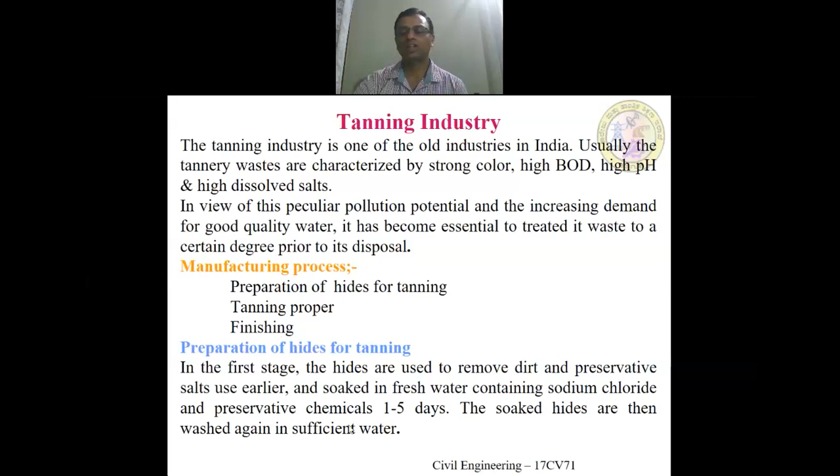How is it manufactured? The manufacturing process includes preparation of hides for tanning, tanning proper, and finishing. Preparation of hides for tanning: in the first stage, hides are washed to remove dirt and preservative salts used earlier and soaked in fresh water containing sodium chloride and preservative chemicals for 1 to 5 days. The soaked hides are then washed again with a sufficient amount of water. So here you get wastewater with a highly alkaline condition.

Limed hides are then mechanically cleaned of hairs and flushed in wooden vats with running fresh water. The bating prepares the hide for tanning by reducing pH. So by reducing pH, we can go for tanning. The deliming and bating is carried out in a vertical drum in a warm solution of ammonium salts and commercially prepared enzyme. So to reduce the chemicals, we can use enzymes.

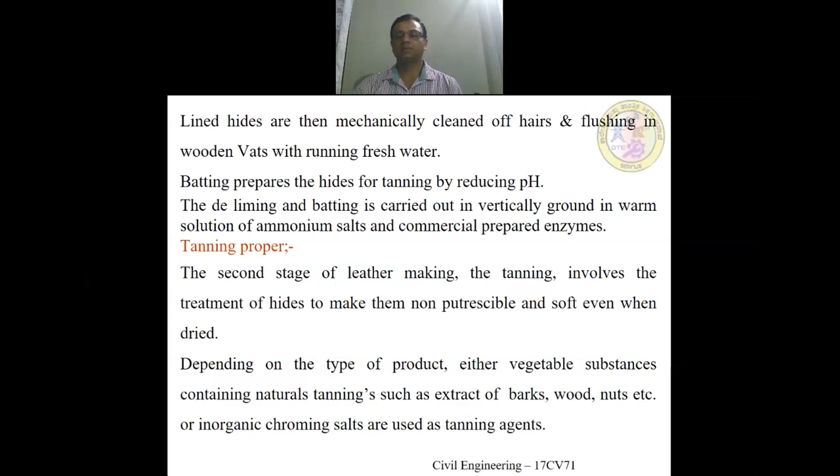Tanning proper is the second process. In the second stage of leather making, tanning involves treatment of hides to make them non-putrescible and soft even when dried. The second process concentrates on making it soft. Depending on the type of product, either vegetable substances containing natural tannins such as extracts of barks, wood, nuts, etc. or inorganic chromium salts are used as the tanning agent. Vegetable tanning is used for heavy leather while chrome tanning is used for light leather. So here vegetable tanning for hard and chrome tanning for light leathers. The vegetable tanned leathers are washed off after tanning proper.

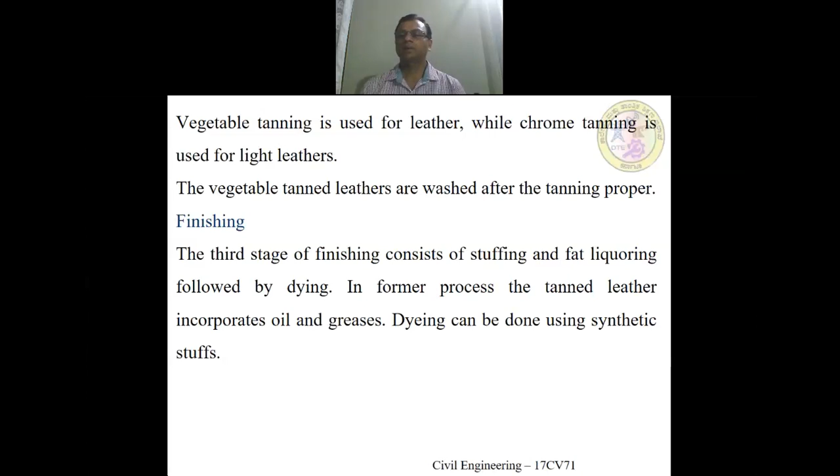The last step is finishing of the leather. The third stage of finishing consists of stuffing, fat liquoring, followed by dyeing. In the former process, tanned leather incorporates oil and grease. Dyeing can be done using synthetic dyestuffs.

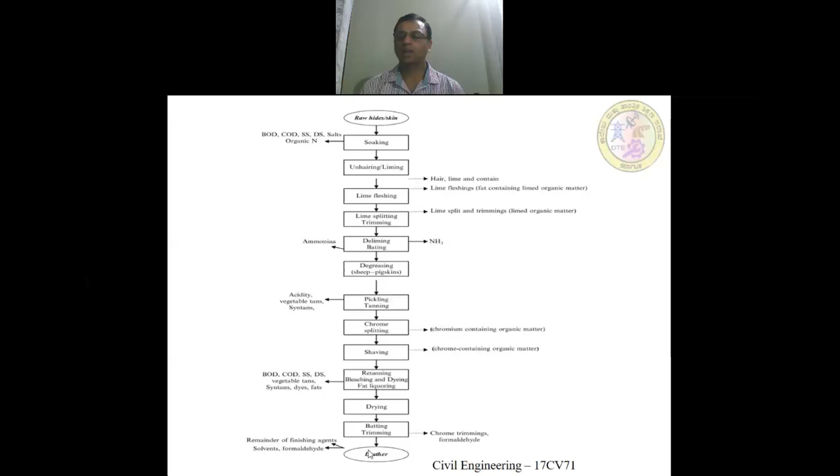Here we're going to get BOD, COD, suspended solids, dissolved solids, vegetable tan, etc. Then it goes for drying, then trimming, so chromium trimmings, formaldehyde, etc. For the vegetable, we're going to have a remainder of finishing agent, solvent, formaldehyde, then you're going to get leather. So in this process, you're going to get a rich amount of BOD, high pH, etc.

Then we'll discuss sources and characteristics of wastewater. The wastewater originates from all operations in the tanning process. The waste may be classified as continuous flow waste and intermittent flow waste. Spent liquors belonging to soaking, liming, bating, pickling, tanning, and finishing operations are discharged intermittently. Although small in volume, they are highly polluted and contain a variety of solutes and organic and inorganic substances. This liquor undergoes putrefaction very rapidly as it offers a good amount of nutrients and a favorable environment for bacterial growth.

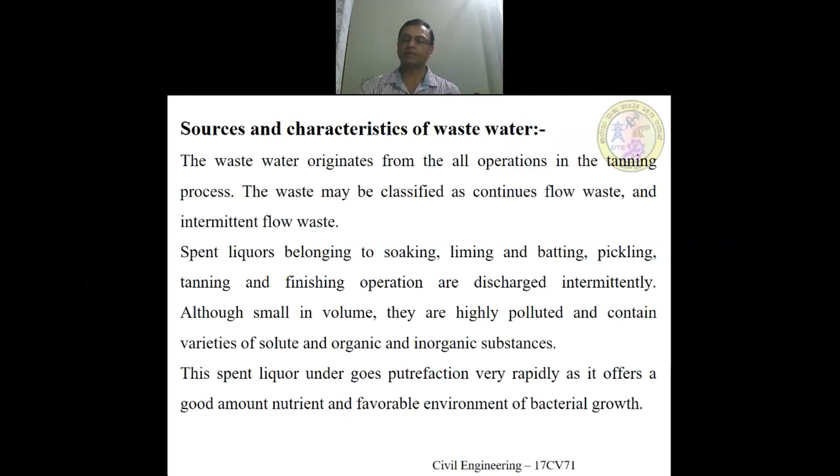So here you're going to take a skin. It is made up of organic substance, so it is going to putrefy very fast. That means if it's kept for some more time, it starts smelling and there's an odor around the place. So here the spent lime liquor contains dissolved and suspended lime, colloidal proteins and degradation products, sulfide, emulsified fatty acid matter, also carrying sludge composed of unreacted lime, calcium sulfide, calcium carbonate. As such, the spent lime liquor is highly alkaline with moderate BOD and high ammonia nitrogen content. So here we observe high alkalinity, more BOD and ammonia nitrogen.

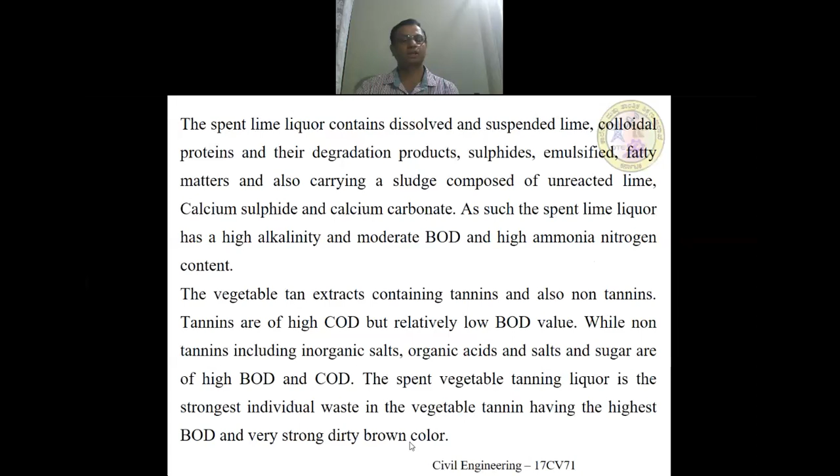The vegetable tan extracts contain tannins and also non-tannins. Tannins are high in COD but relatively low in BOD value, while non-tannins include inorganic salts, organic acids and salts, and sugars of high BOD and COD. The spent vegetable tanning liquor is the strongest individual waste in vegetable tanning, having a high amount of BOD and very strong dirty color.

And what will be the effect of this waste on streams or sewage plant? As I discussed earlier, the tanning industry waste is having high amount of BOD, suspended solids, and strong color. When you're going to use vegetable tan, we're going to have a high dirt color.

The waste which is discharged into the stream is going to deplete DO; DO is going to be depleted by high amount of BOD due to both chemical and biological oxidation of sulfide organic compounds. Chloride in excess of tolerance limit 500 mg per liter renders the water unsuitable for future use. Chromium is toxic to aquatic life and inhibits the growth of fish in the stream.

Even the lagooning of the untreated tanning waste on open land may adversely affect the groundwater and near surface water sources due to seepage of dissolved solids. So here we are going to have more amount of chloride. It has to be treated.

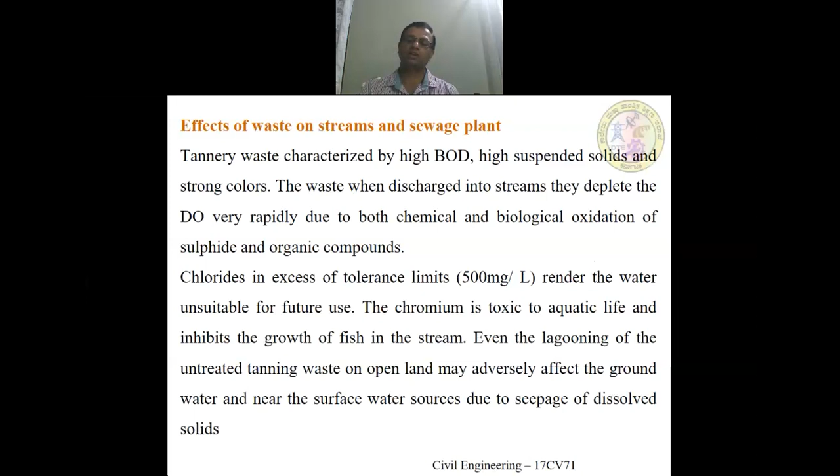Then the other one is we are going to think of removal of this chromium, which is very much toxic since it's a heavy metal; it affects aquatic plants, the growth of some fishes and also some aquatic life. And when you're going to dispose it without treatment, it also affects the groundwater.

The chromium compound in excess of 10 to 20 milligrams disrupts the operation of the trickling filter, since this chromium is going to affect the biological process where it's going to kill microorganisms. Sulfides are also toxic to microorganisms and are removed along with the sludge.

The chemicals or suspended solids are going to be removed by chemical coagulation using alum, ferric chloride or ferric sulfate with or without neutralization, because some of the coagulants work in a higher range of pH, followed by biological treatment. So the first step is you are going for neutralization. Later, you're going to remove by chemical coagulation using some of the salts, ferric salts or alum.

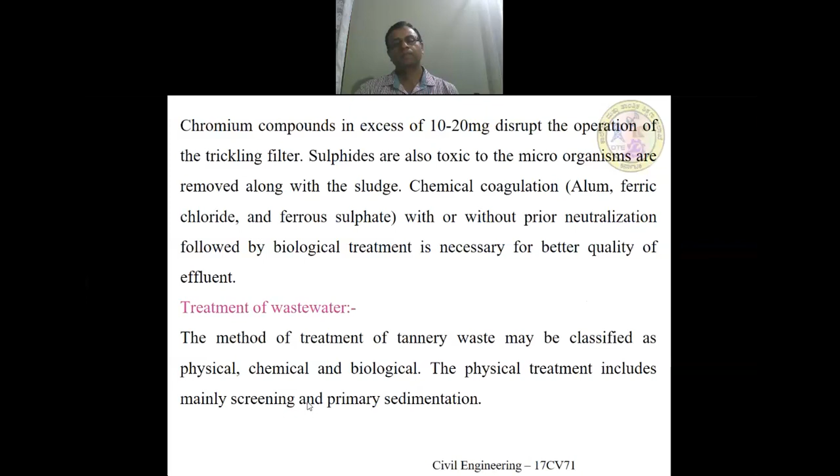Treatment of wastewater. The method of treatment of tannery waste may be classified as physical, chemical, and biological. Physical treatment is nothing but screening and primary sedimentation tank. So in the physical method, you are going to remove hair and other things from the skin. Later, you are going to allow it in the sedimentation tank.

About 98% of chromium is precipitated in the primary sedimentation tank and removed along with the sludge. Chemical coagulation with or without neutralization followed by biological treatment is necessary for better quality of the effluent.

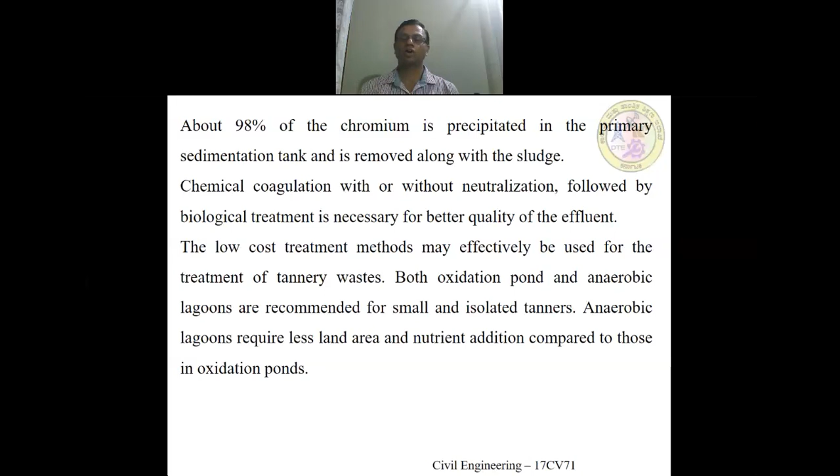Low-cost treatment methods may be very effective for treatment of tannery waste; oxidation pond or anaerobic lagoon are recommended for small or isolated tanneries, where you are going to remove a rich amount of BOD. Anaerobic lagoon requires less land area and nutrient addition compared to oxidation pond.

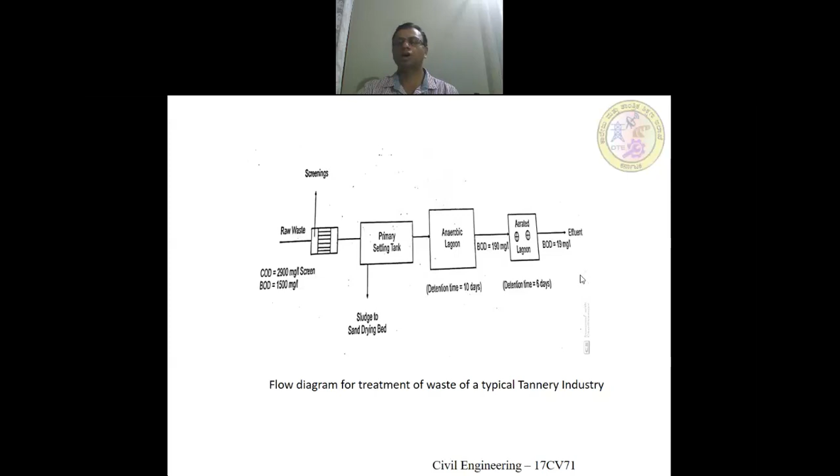So here is a simple process where we have physical, chemical and biological processes. In the anaerobic lagoon, you give a detention period of 10 days. In the aerated lagoon, you give 6 days of detention period. So BOD is going to meet the standard of 19 milligram per liter. Then it can go for disposal on river or land.

So in this class, we discussed how tannery industry wastewater can be treated.